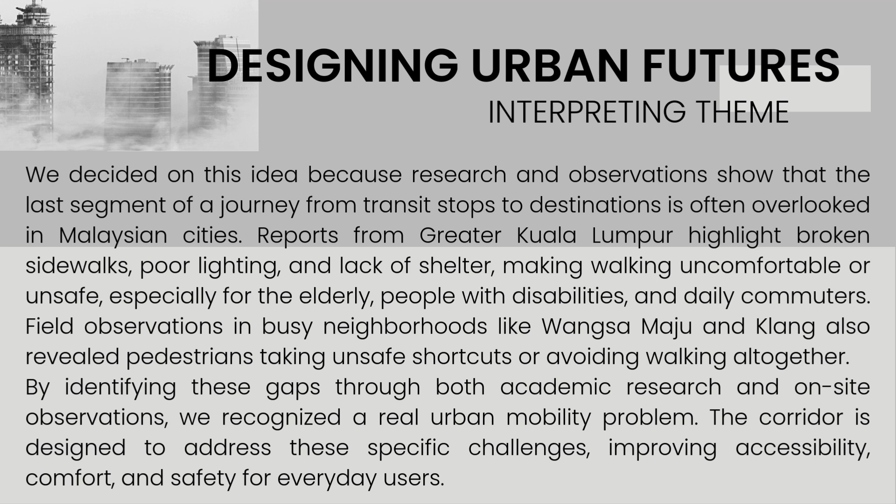Now I will talk about idea one: the Last 500 Comfort Corridor. We chose this idea because research and observations show that the last part of our journey from transit stops to final destination is often neglected in Malaysian cities. In Greater Kuala Lumpur, issues like broken sidewalks, poor lighting, and lack of shelter make walking unsafe and uncomfortable, especially for the elderly, people with disabilities, and daily commuters. Site visits in areas such as Wangsa Maju and Klang also show pedestrians taking unsafe shortcuts or avoiding walking completely. By combining research and field observation, we identify a clear urban mobility problem. The corridor is designed to improve accessibility, comfort, and safety for everyday users.

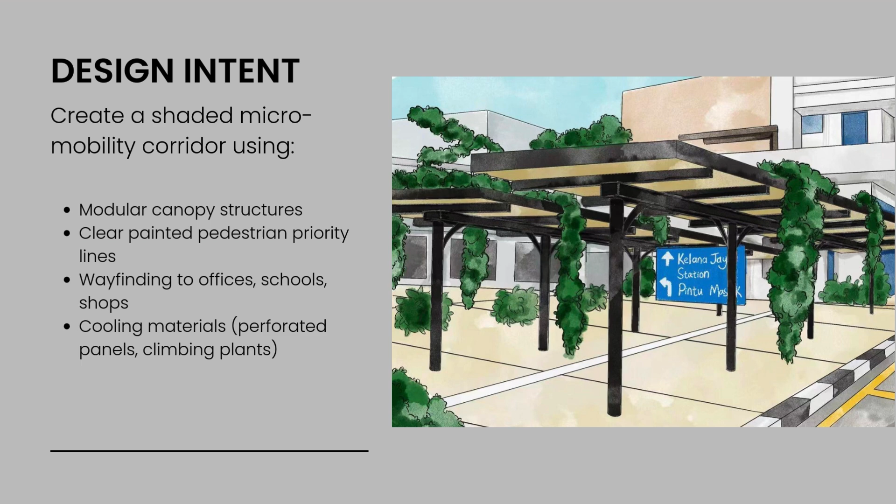Now we move to the design intervention part with our sketches. We propose creating a shaded micro-mobility corridor to make short urban journeys safer and more comfortable. The corridor will include a modular canopy structure to provide continuous shade and protection from rain, clear painted pedestrian priority lines to guide movement and improve safety. Wayfinding signage will help users easily locate nearby offices, schools, and shops. To reduce heat, we will use cooling materials such as perforated panels and climbing plants. Together, these features create a more accessible, climate-responsive, and user-friendly urban environment.

Now we come to the impact part. It will increase public transport use by making the final 500 meter walk comfortable and reliable, and reduce short car trips around LRT stations, lowering congestion and emissions. Next, it improves pedestrian safety through shaded corridors and clearer crossings. We also can strengthen walkability in high traffic urban zones, and lastly, activate underused streets into functional public walking spaces.

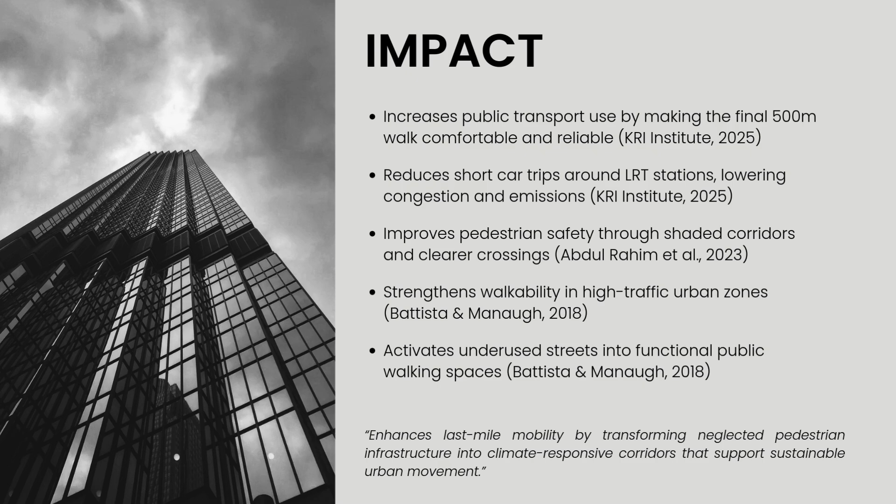Now I will talk about the value part. First is human value: improving thermal comfort for daily pedestrians, as shaded corridors and climate-responsive materials reduce heat exposure. Next is supporting vulnerable users, as safer crossings and predictable walking paths improve accessibility for the elderly, and reduce commuting stress and fatigue, as comfortable pedestrian structures lower physical strain and improve the daily walking experience. Last is building confidence in pedestrian movement, as reliable last-mile infrastructure encourages commuters to choose walking over short car trips.

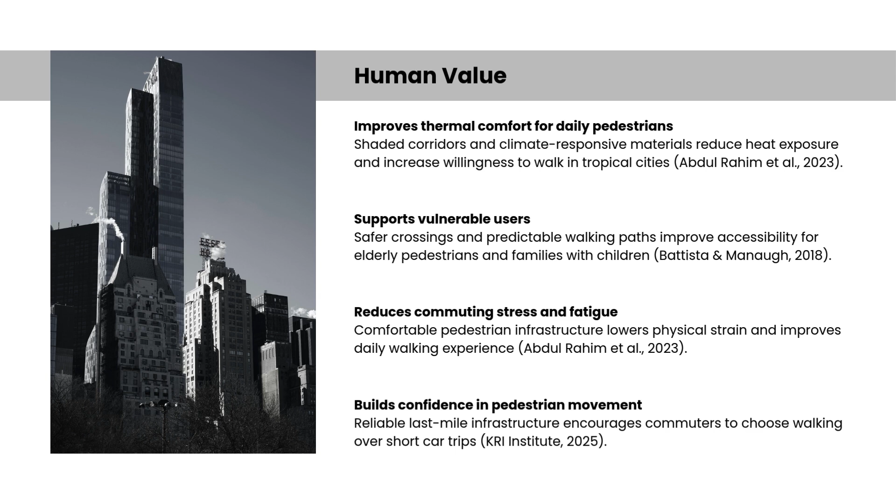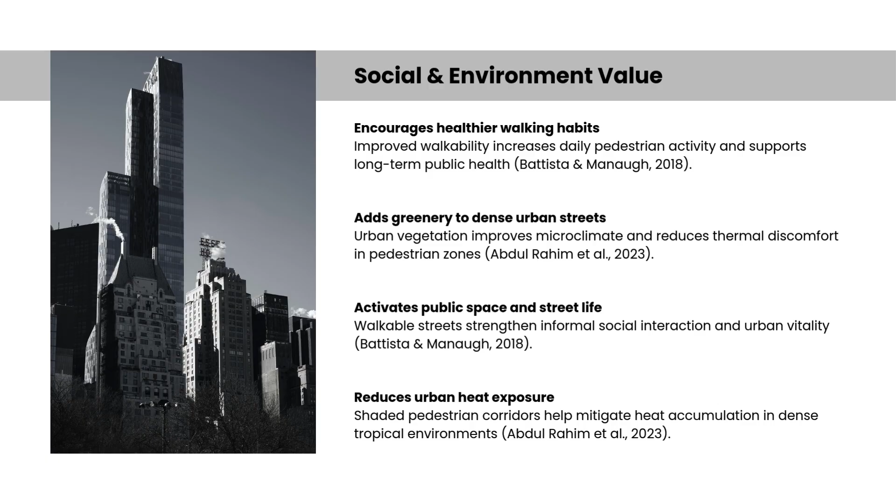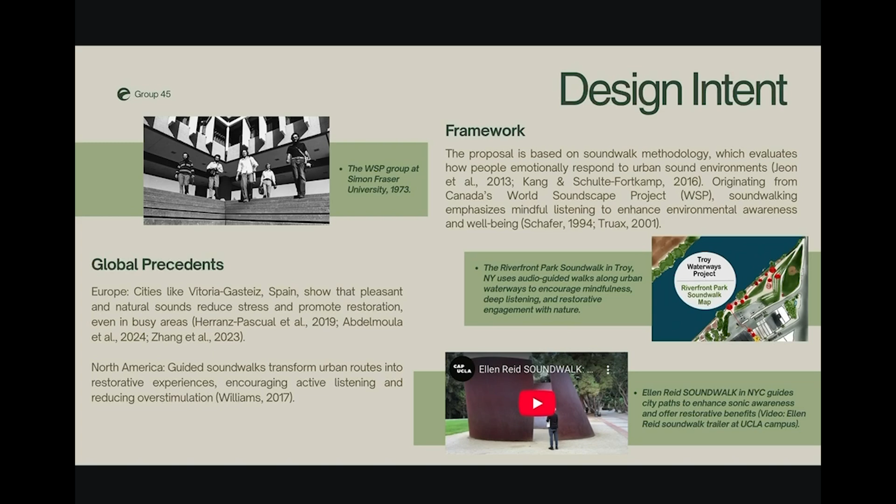Hi, I'm Eileen Tang. Our design is inspired by the Soundwalk concept, which explores how people experience everyday sounds. It began with the World Soundscape Project in Canada and encouraged mindful listening instead of removing all noise. Research shows that natural sounds can reduce stress, and guided soundwalks can make daily roads more calming and meaningful.

So we applied this idea to our campus road. Natural sounds like water and birds can soften traffic noise. Soft familiar music can support mood and focus. Shaded paths and safer crossings improve comfort.

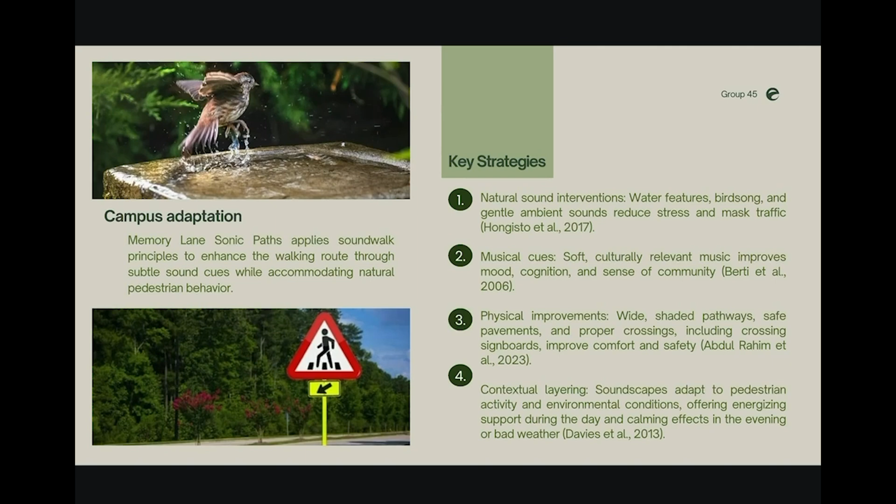The sound setting can also shift, becoming livelier during peak hours and calmer in the evening.

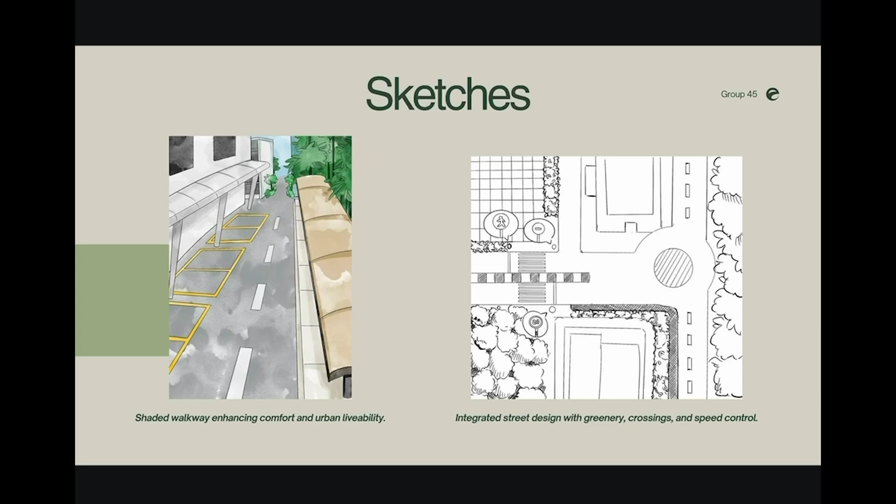The sketches show shaded walkways, added greenery, safer crossings, and traffic calming elements combined into one clear plan. The project can reduce stress, improve mood, encourage walking, and refresh the mind. Safer paths reduce risk, while shared sound experiences strengthen community feeling.

The physical changes are simple and practical. Small water features are timed. Audio systems require low maintenance. We can test the design in key areas first and refine it through user feedback.

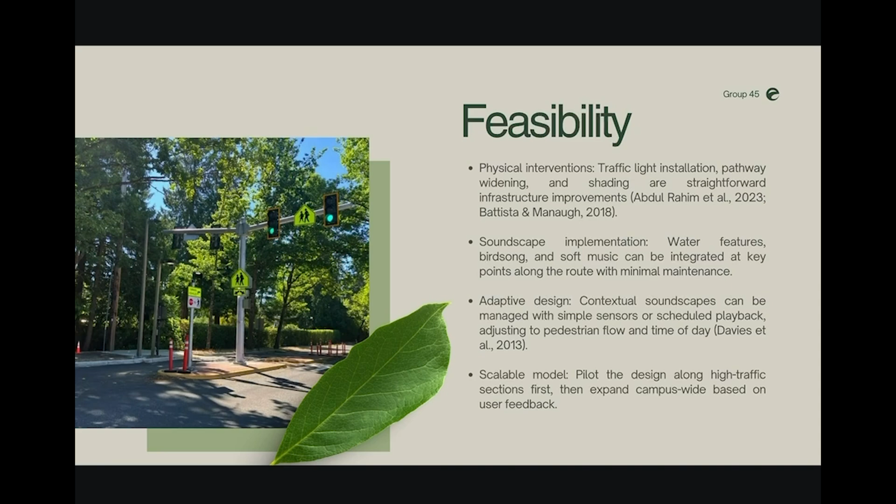Thank you very much. So for the third idea, this proposal focuses on rethinking public seating in Bukit Bintang.

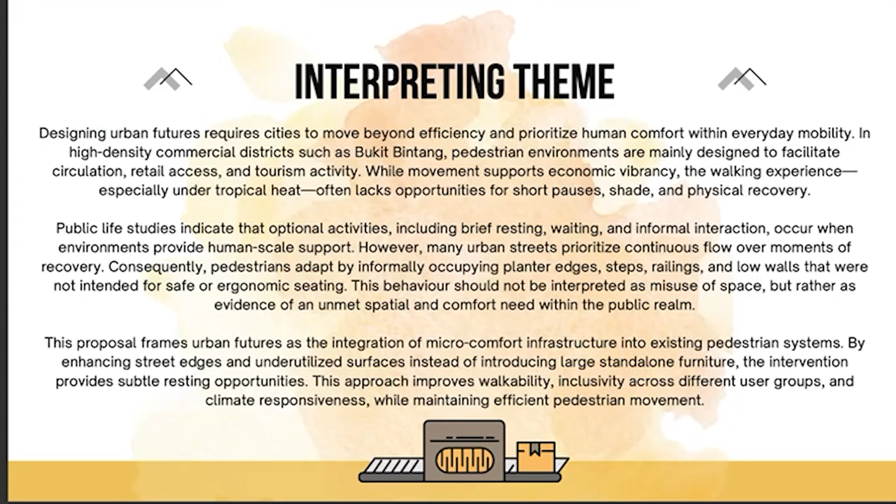In high-density commercial streets, spaces are mainly designed for movement, supporting retail, tourism, and circulation. But in a tropical climate, constant walking without shade or rest creates physical fatigue and discomfort. Because of this, we often see pedestrians sitting on planter edges, steps, or low walls, rather than viewing this as misuse of space, we see it as evidence of an unmet comfort need.

Our target users include commuters, elderly pedestrians, students, tourists, and transit users. Many experience walking fatigue, heat exposure, and a lack of short rest support. Most available surfaces are hot and not ergonomically designed for sitting. The issue is that walkability is encouraged, but recovery is not integrated into the pedestrian system.

So our proposal introduces subtle integrated seating solutions instead of adding bulky benches. By enhancing existing street edges with ergonomic adjustments, heat-reducing materials, and shaded micro-rest points, we embed comfort into the urban fabric without interrupting movement. This approach allows the street to support both mobility and human comfort at the same time.

Now I will introduce our design response to address these challenges. Instead of adding new benches that take up additional space, our proposal enhances existing planter edges and transforms them into ergonomic seating. This directly responds to the informal seating behavior observed in Bukit Bintang. We standardized the seating height between 400 to 450 millimeters to ensure comfort and accessibility.

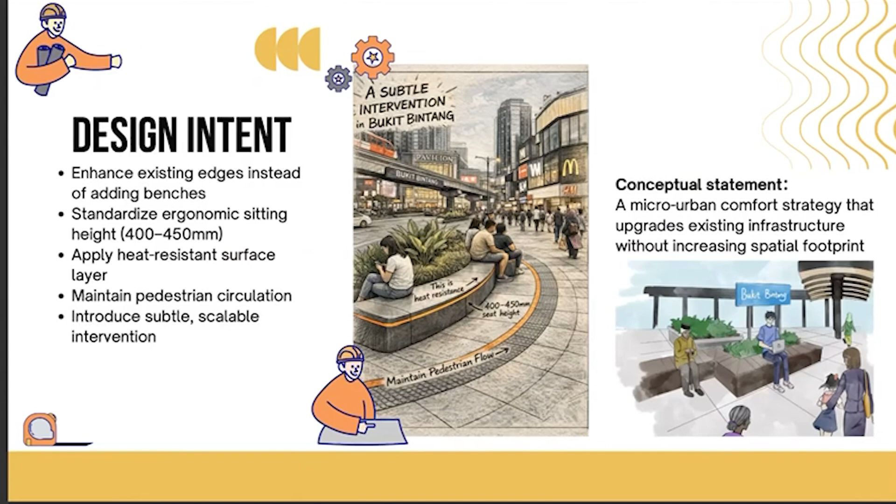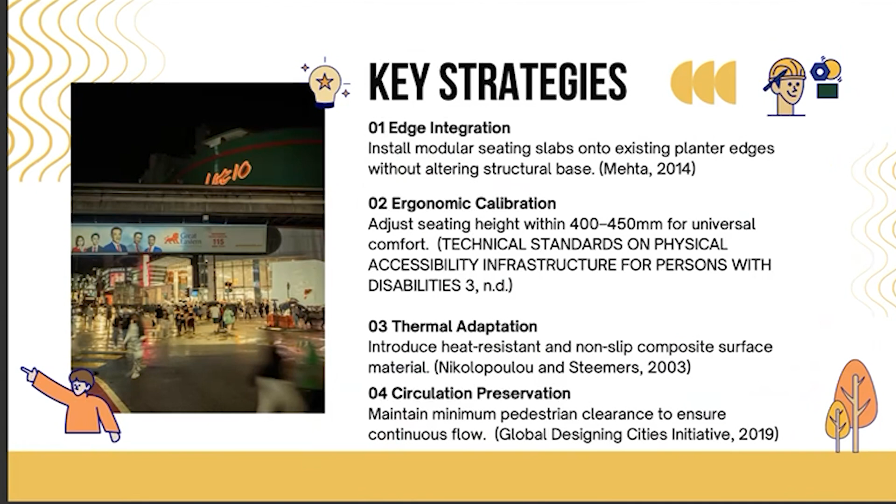To address thermal discomfort in Malaysia's tropical climate, we apply heat-resistant and non-slip surface materials while maintaining sufficient pedestrian clearance to preserve smooth circulation. Through edge integration, ergonomic calibration, thermal adaptation, and circulation preservation, our interventions provide subtle but effective resting opportunities. As a result, it reduces walking fatigue, improves thermal comfort, enhances walkability, and strengthens the overall urban experience without increasing the spatial footprint.

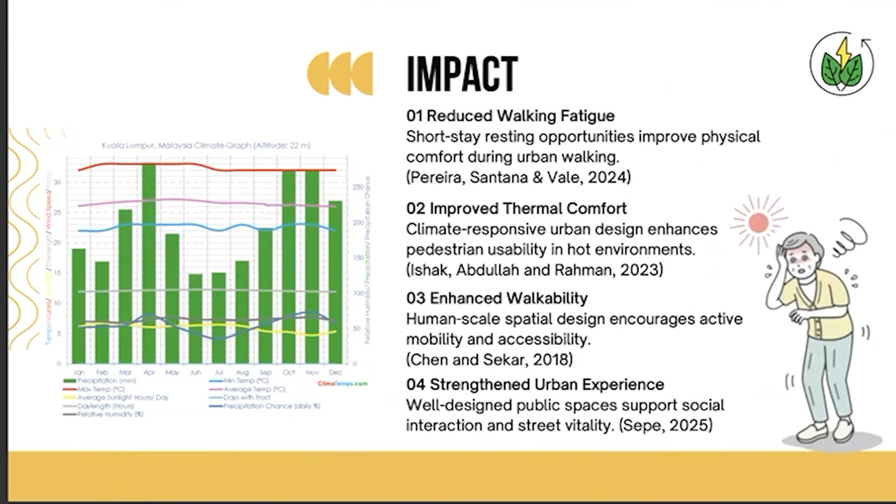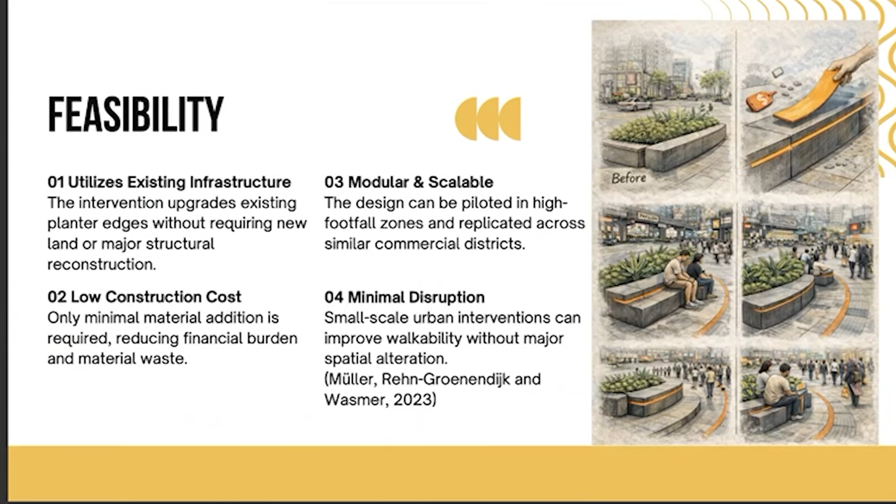Importantly, this proposal is highly feasible. It utilizes existing infrastructure, requires minimal construction costs, is modular and scalable, and can be implemented with minimal disruption to pedestrian movement. Thank you.